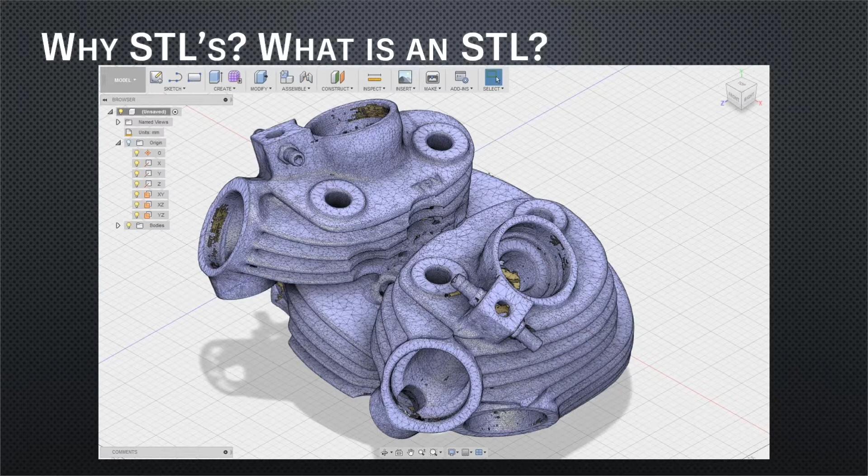So why even work with STLs in the first place? Oftentimes, that's all we have to work with. We go to war with the army that we have. Sometimes your boss or your customer scans the model, and that's all they're going to send you. Usually when you scan data, it comes in as an STL file or a mesh.

Oftentimes, too, we see that customers send you the STL model because they want to protect the IP, right? So intellectual property, they don't want to give away the dimensions. Maybe they want to keep some of that data to themselves until they're ready to really go forward with that model or that body there.

All right, so let's go ahead and jump into Fusion and start seeing how we tackle some of these issues, right? So before we do start, there was a recent update to Fusion 360. So of course, we'd like to cover some of the updates here as well. Really, the most notable update that I'm going to be talking about is related to the sketch functionality. So again, if we click on the sketch, most of you guys may be familiar with having a little arrow here pointing up. So essentially what that did was it brought that command up to your toolbar up here, right?

Now, though, we see that we have these 3 little dots, right? So if we expand those 3 little dots, we see that we have a couple options here. So now, of course, we do have that option to pin to the toolbar, but we also have this option to pin to shortcuts, right? So let me go over to, let's say, a slot in this case. So center to center slot. Let's say for whatever reason I use that a lot, I can go ahead and pin it to my shortcuts.

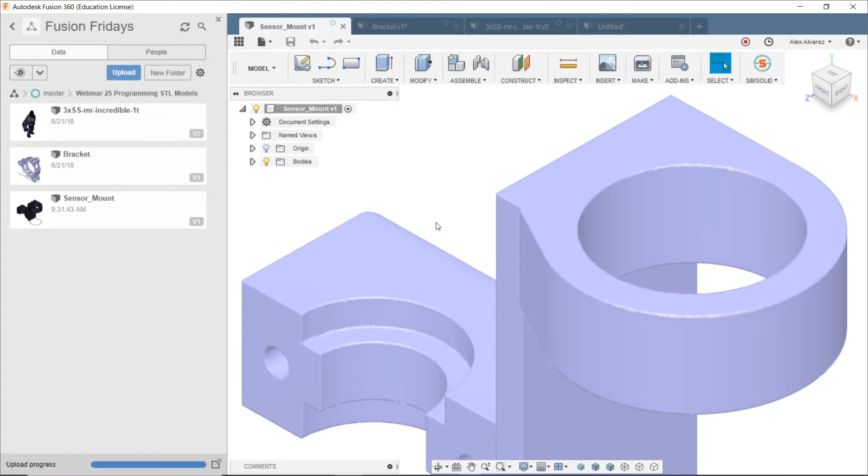All right, so let's go ahead and jump into a model here. So again, we have an STL model. Seems to be some sort of a mount. If we zoom in, we see that it's comprised of really thousands of triangles, right? We've been tasked with machining some sort of prototype for this. And the only critical region that we want to focus on is going to be this hole here. Let's say it needs to be within spec. So we need to make sure that we machine this hole as closely as possible to what they asked for, right?

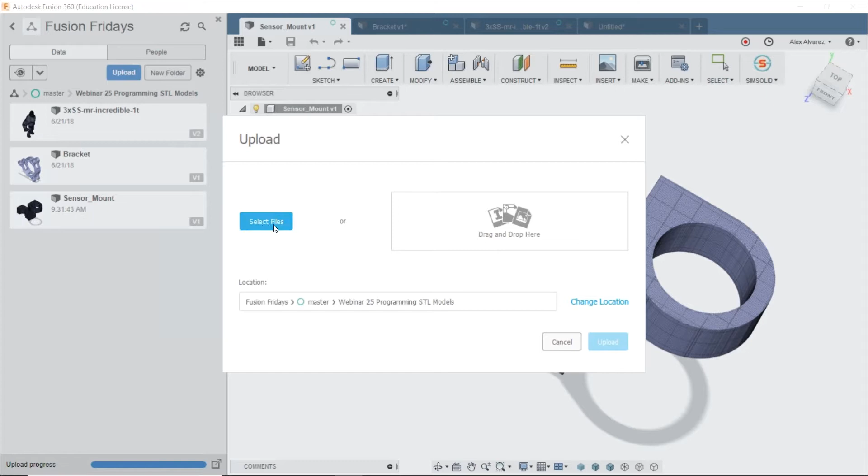So again, we're in the model workspace. A lot of people still aren't too familiar with how to upload models. That's pretty straightforward. You start a project, whether that's a new project or maybe an old project that you already have. Just go into upload. After you click on that, select the files, and then just hit upload here on the bottom, right? So it's pretty straightforward and pretty easy to upload your models into Fusion.

All right, so once you have the model into Fusion, we would want to go into the CAM workspace. For those of you that aren't familiar with the CAM workspace, it's pretty straightforward. The workflow that we're going to be following is from left to right.

We're going to create our setup, add toolpaths. Again, if you guys have Fusion 360 Ultimate, you do get 4th and 5th axis capabilities. And then after we lay out those toolpaths, we want to make sure that we simulate, have no collisions or unexpected movements. And then finally post out to our machine.

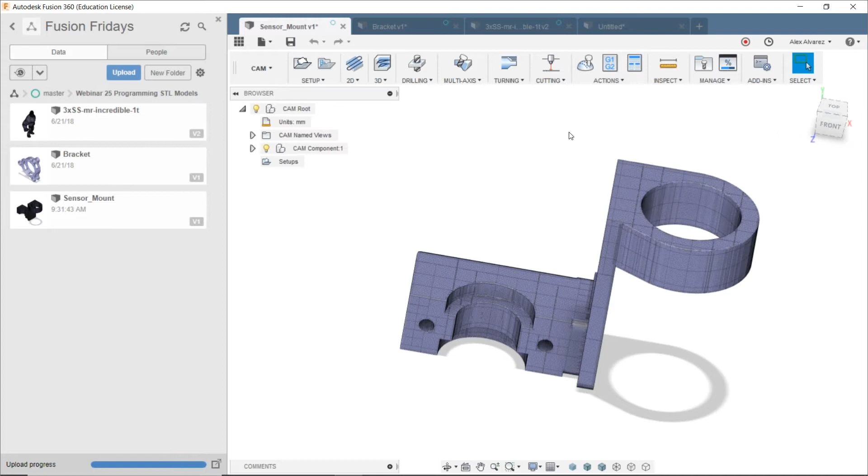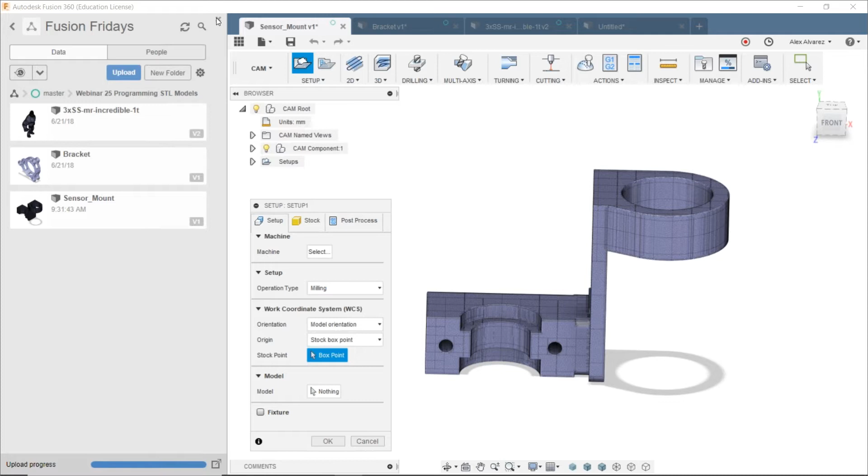All right, so first things first, let's go ahead and create our setup. If you guys have been using the CAM workspace for quite a while, you'll notice that something's different. When I click on setup, usually we see the stock defined around the model. This time we don't. Let me go ahead and make some room here. Let's see what's going on.

So if we zoom out, we see that we have, first off, the coordinate all the way down here, our work coordinate system. If you zoom in, you see that you have essentially a tiny little stock reference right here. So a lot of people forget that we have this little model section. This model section is essentially going to tell the software, okay, that's the model that I'm going to focus on for creating toolpaths. In this case, there's nothing there. That's why it doesn't see which body I'm going to be selecting.

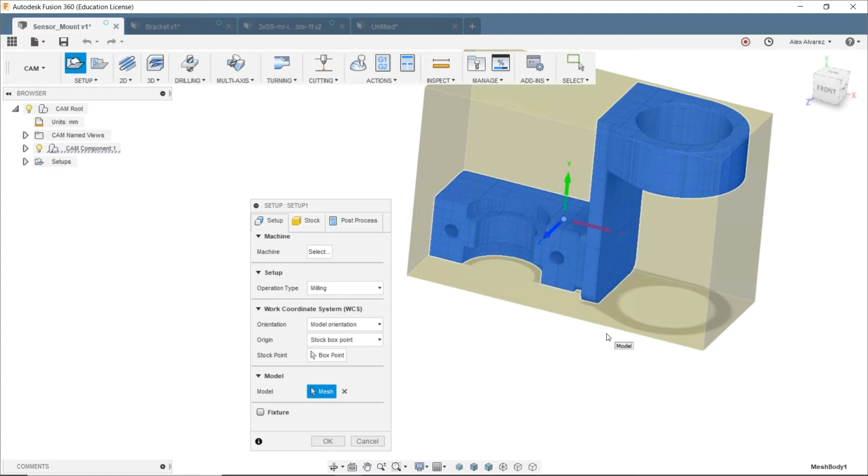So let's go ahead and make sure that we select this initial body. Notice too that you don't have to really convert that STL file into a different body. You don't have to convert it into a different file extension. You can drive toolpaths off of STL files directly. So that's one of the key points that I want to get across here. So we're able to get the stock preview of the STL file.

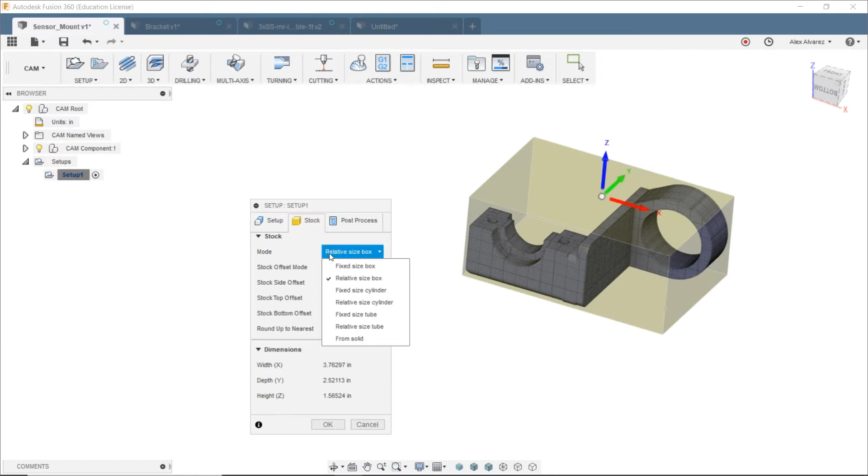Again, selecting our stock, it's at relative size box. Notice that I'm in millimeters as well, so let me go ahead and change that real quick. Change that to inches and click OK. All right, so I'm in relative size box. Again, I get some weird dimensions for our stock size. I can just change that to a fixed size box, get some nicer values down there. The work coordinate system, again, is positioned center block of the stock, which is fine with me. So I can just go ahead and click OK.

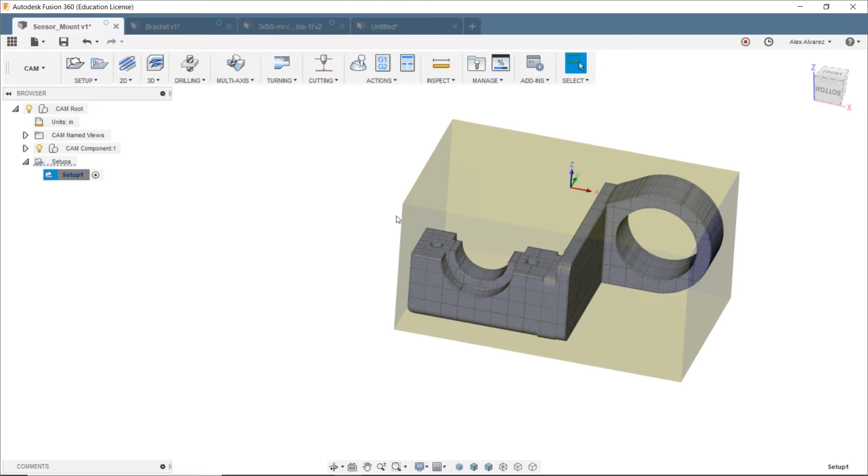All right, so we got part of it done. We selected the stock, we picked where our work coordinate system was at. Now let's go ahead and start adding some toolpaths. So again, I want to do a roughing strategy, and like I mentioned, we're just going to focus on this area here.

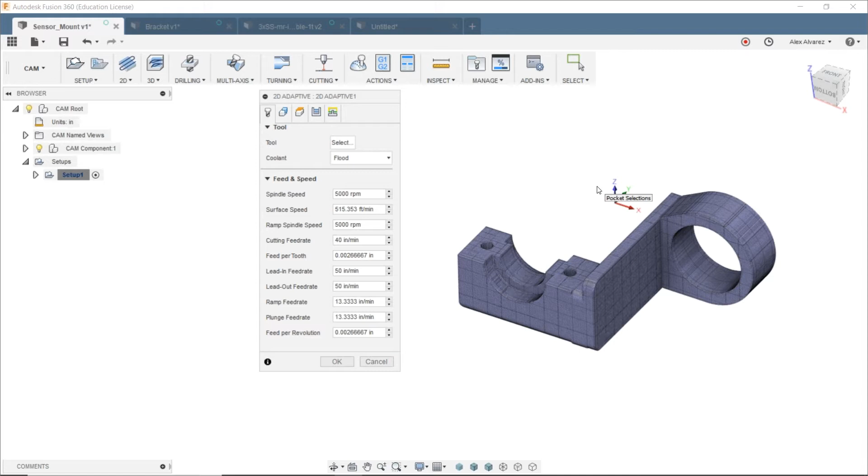So let's go ahead and try to do some sort of 2D adaptive strategy. Let's go ahead and select our roughing strategy. Again, if you guys notice, our tool orientation is like this. So this is going to be kind of killing two birds with one stone here, but I'm going to be talking about positional milling. In this case, we're assuming that we have a 5-axis machine.

Again, we're going to want to rotate the part this way. And notice that my work coordinate system, though, is positioned in the wrong orientation. So to do that, if you guys have Fusion 360 Ultimate, you have this little option on the bottom, the tool orientation. That's essentially how you're going to tell the software to rotate the part, or essentially how you're going to be telling the machine to rotate it in respect to whatever work coordinate system you had originally.

Now, again, when working with STLs, you don't have the ability to select on faces. Usually we're able to select this face and it reorients the work coordinate system accordingly. So in this case, if we zoom out again a little bit, we see that we still have these planes here, so let's go ahead and select this plane there. And my x-axis is going to be going this way.

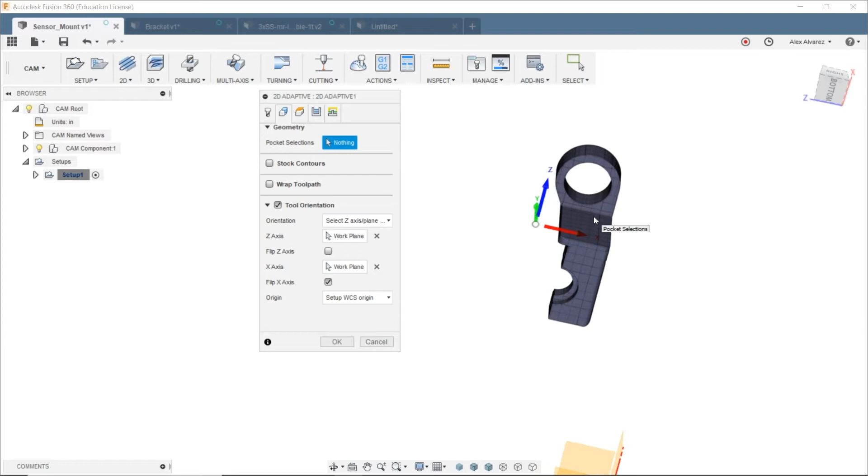All right, so now that we have that, let's go ahead and pick some geometry. For pocket selections, which pocket do we want to machine? We want to machine this pocket right here. So we zoom in here. What's going on? I'm not able to select any geometry.

That's because it's an STL file. First off, we don't even have nice geometry to select, so it's not going to allow us to do that. Let's zoom out a little bit and figure out a better way to do that.

So we tried using a 2D toolpath. Again, 2D toolpaths really need some sort of geometry to work off of, whether that be a face, some sort of edge, some sort of geometry or chain to drive that 2D toolpath. Now 3D toolpaths work off of the body that you have. It looks at the stock, it looks at the body that you have inside, and then it tries to remove as much of that stock as possible until it gets to, or as close to, the model as it can.

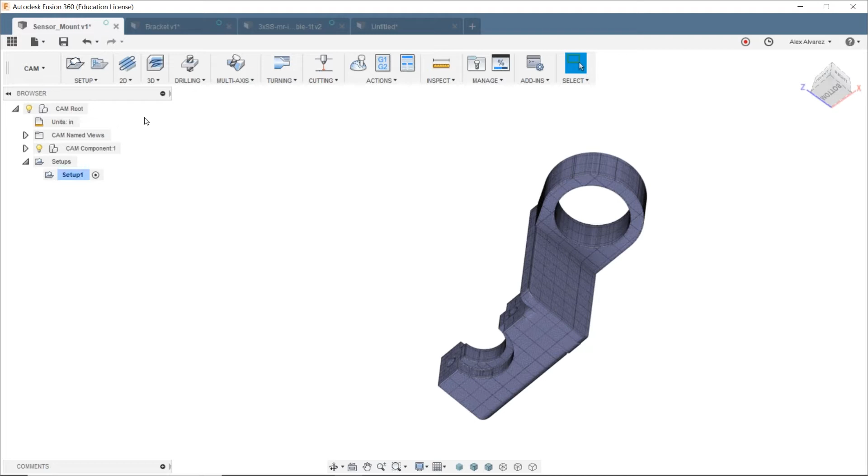So that's what we want in this case. Let's go ahead and try a 3D adaptive. Again, selecting our tool - in this case, let's say I can use a 1/2 inch flat.

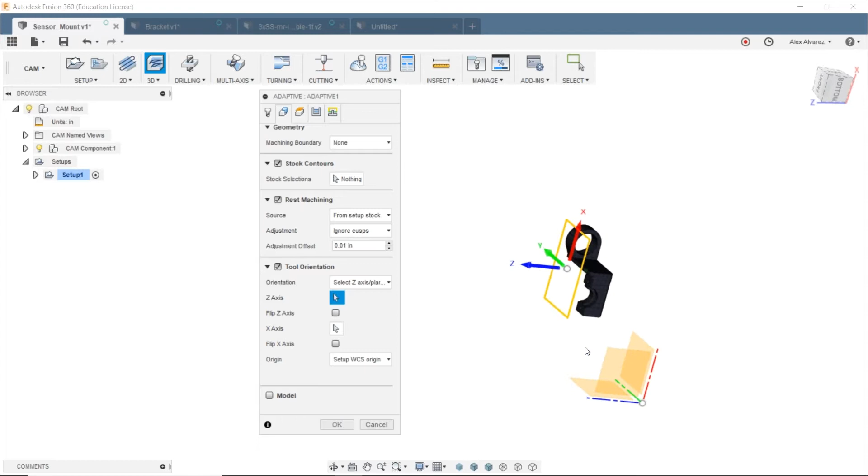And then selecting our tool orientation, same thing as for the 2D adaptive. In this case, we don't even see the tool orientation, and that's because we don't have it checked on. If we check it on, we see that we have those planes up here. So once again, the z-axis is going to be this one right here, and the x-axis is going to be perpendicular to that plane. Just reorient that - okay, so we have this selected.

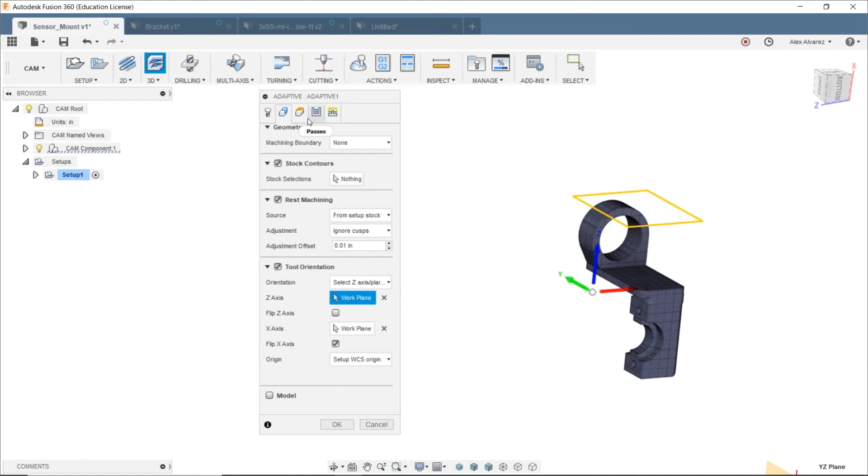For machining boundary, again I wanted to look at the entire model or the entire boundary of the model, so I don't necessarily need to select anything there. What I do want to constrain, though, is the heights. If I left it as it is now, the tool would try to machine all the way to the bottom of that part.

So typically, especially when people are starting off with 3D toolpaths and they're not too familiar with how they work, I'd preach that a lot of people should just select the tool and just select the machining boundary and then click OK and see what the toolpath gives you. If you guys aren't too familiar with 3D toolpaths, typically try to stick to that workflow. If you come into the passes tab and try to change some of these options, and the toolpath does something you aren't familiar with, it's harder to go back and figure out which one of these options made that toolpath act the way it's acting.

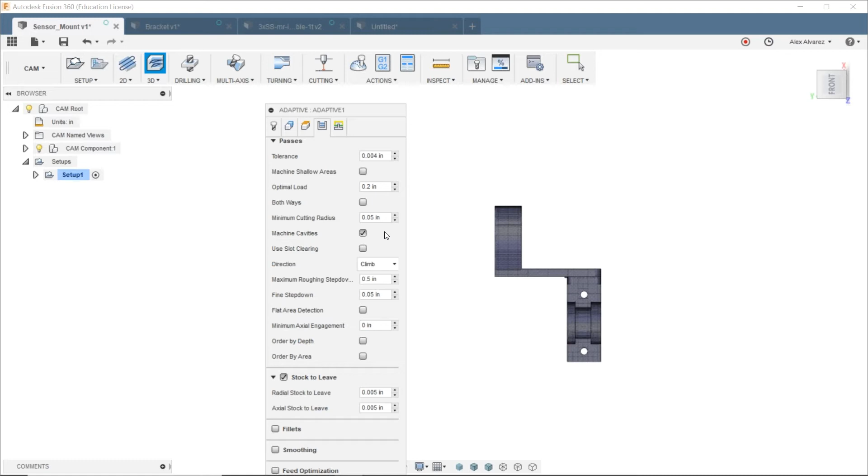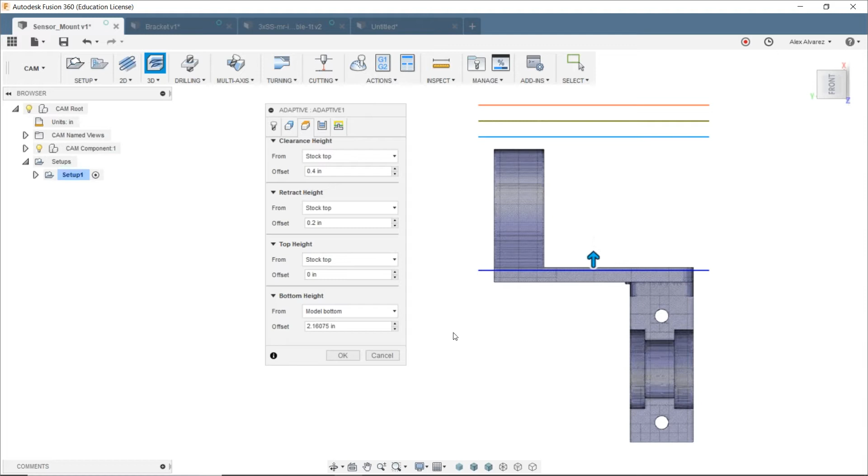So in this case, all I really want to change here then is the heights. The bottom height, I can do model bottom. And again, if I knew some of these values, I can go ahead and input the values, but for now I'm just going to kind of use the eyeball method, get somewhere close to the bottom there. That's going to be fine with me.

All right, so there's our toolpath. Again, it's a roughing toolpath, so by no means am I going to have nice surface finishes yet. We can go ahead and simulate it. Let's go ahead and simulate that. We can turn the stock on.

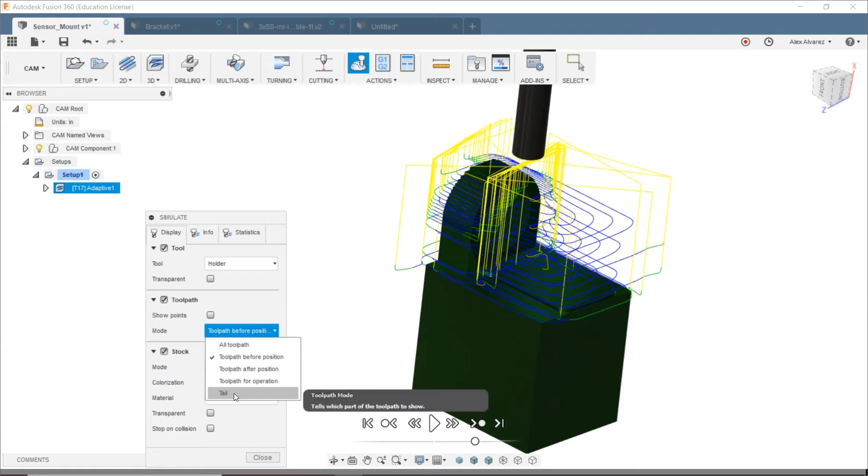Again, the option that I like to stay with for the toolpath is tail, and it just shows the toolpath as it already goes through it. So I can speed some of this up. And of course, I can go back into the toolpath, fine tune it if I need to, maybe change the retraction policy to get rid of some of these high retracts. But for now, that's going to do it for me.

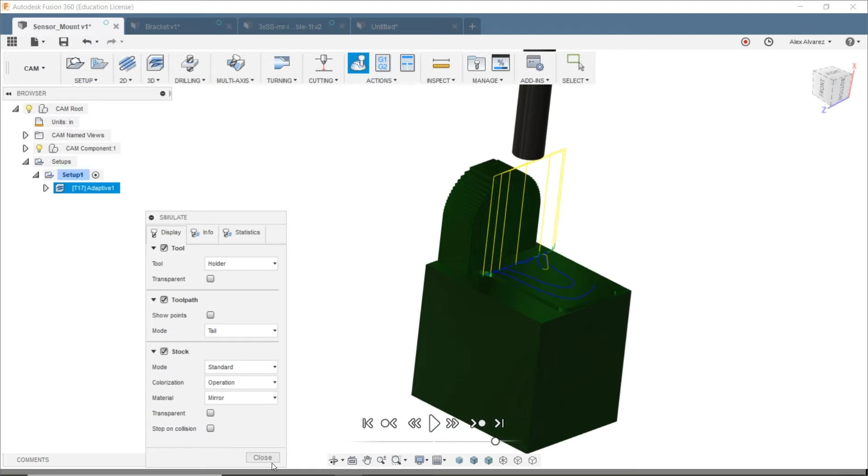So now let's go ahead then, and let's say we're going to rotate the part this way. We want to machine the bore here. So first off, we can go ahead and do some sort of a facing operation here for the top.

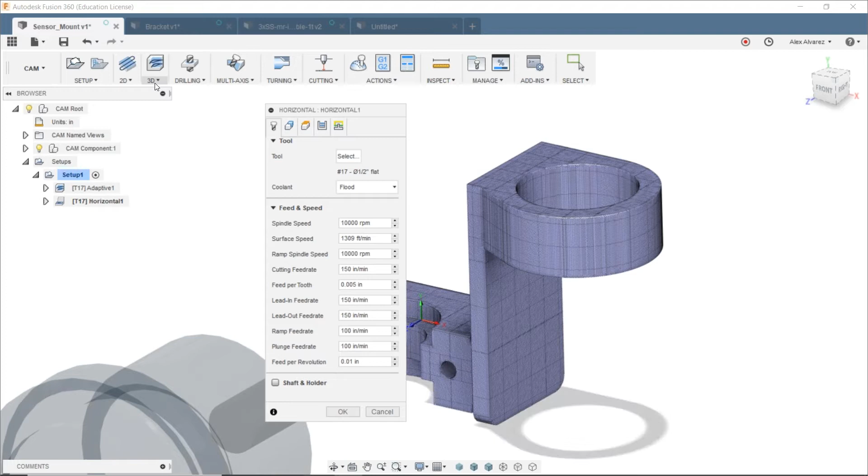So again, for that, I would probably use a 3D horizontal. If you kept your cursor over the 3D horizontal toolpath, it would show you what that toolpath is looking for - it typically looks for some sort of a flat face. It looks at the entire model; anywhere you have flat surfaces, the tool is going to try to machine up to that flat surface. So it's definitely a good finishing strategy, especially if your model has a lot of flat surfaces.

Right, so again our tool comes in this way. Let's go ahead and reorient that - tool orientation, z-axis is going to be this one.

X-axis, I can change it to be this one right here. There we go.

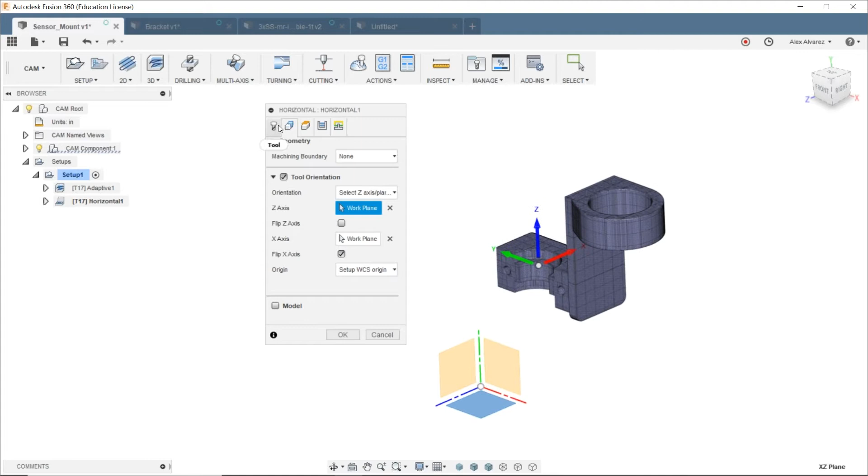Once again, we have to contain it, contain the heights, right? Because if I kept it like this, it would try to machine this other flat surface that it sees here.

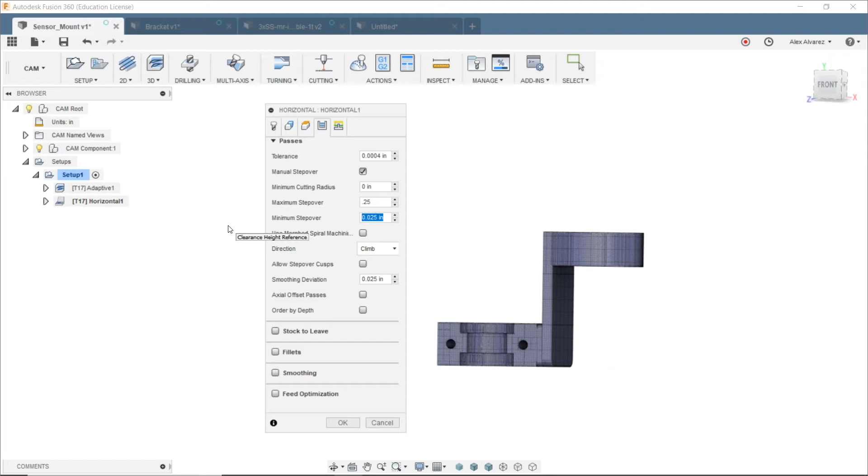So let's go ahead and just contain it somewhere around there. And then for passes, we can do a manual step over. The maximum step over, we can do a quarter inch, and a quarter inch there as well. Click OK.

And then there's a finishing strategy for that flat surface. Now that we have that, let's go ahead and try focusing then on this bore here, right?

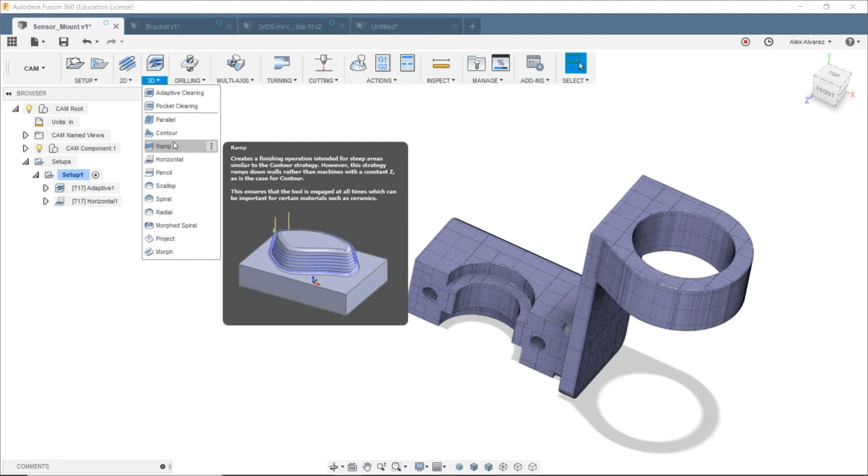So again, I would probably use maybe a... let's try a pocket clearing. Pocket clearing would probably be a nice toolpath.

Notice that I have to do the tool orientation again and go through that whole process all over, so I can go ahead and cancel that. My 3D horizontal toolpath is already set correctly. Maybe the tool, I'm going to need to change it, right? It's not going to fit all that great in there. But really, that's going to be the only thing that I need to change.

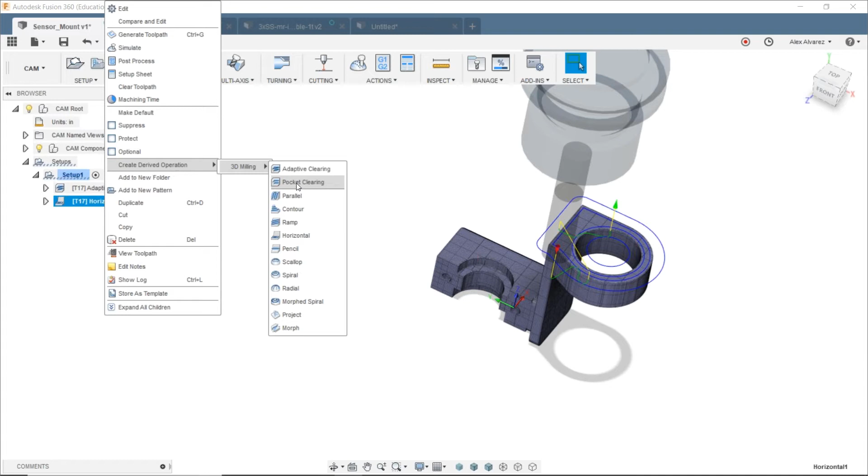So I can just right-click on this, create a derived operation. It's going to take all the parameters that drive the horizontal toolpath, and I'm just going to be creating a different toolpath, using a pocket clearing instead. Like I mentioned, I'm going to be changing the tool that I'm using, so in this case I want to go with a quarter inch flat.

The passes, I can go ahead and just change the height. Maybe this time I do want to go a little bit below that. So that's going to be fine for me.

Passes, again, it's a quarter inch tool, so maybe I wouldn't want to use a quarter inch step over. In this case, I can do some sort of expression. If you guys aren't familiar with how to use expressions, you can just right click on the parameter and edit the expression. In this case, I'm going to do tool diameter, that's 0.2, 20%.

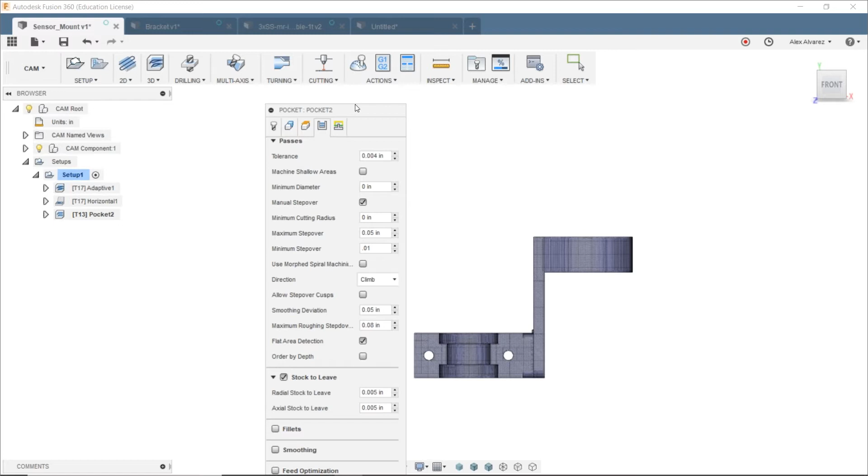Here it's telling me, okay, it's a little bit higher than your maximum step over, so go ahead and change that. Maybe this one... well, I don't know, minimum step over 10 thousandths. Stock to leave is enabled, that's going to be fine. And just click OK.

So once again, let's see what kind of toolpath it gives us. All right, so here we go. Gave us a toolpath. And notice that it's trying to machine the rest of the model here.

So again, this goes back to selecting geometry and containing that toolpath to some sort of area around this model. But again, like we've been talking so far, we don't have any geometry to contain that boundary. So let's go back into the model workspace.

I'm going to want to create some sort of a sketch to contain that pocket toolpath. So first things first, I do want to make sure that I capture the design history, so if I do need to go back and make a change to the sketch, I can always just edit that sketch on the bottom here of the timeline. Again, change that to millimeters, inches.

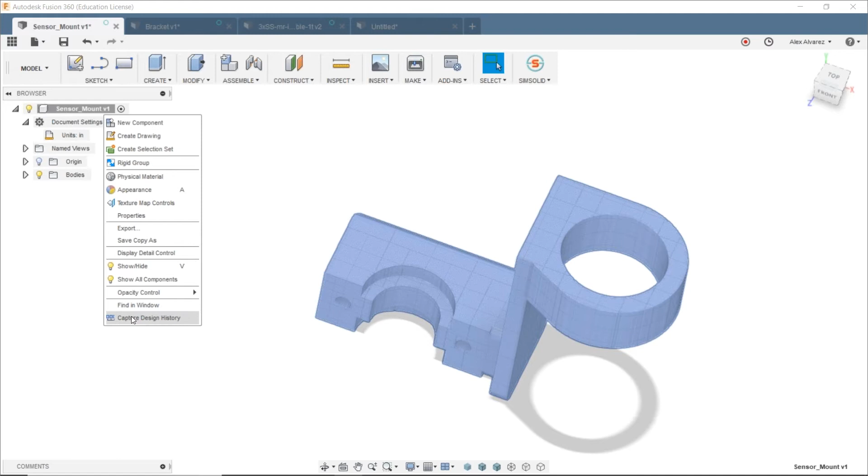The way you capture design history is you right click on the very top of the node here, and the last option is going to be capture design history. Now notice that we have this little timeline at the bottom. Now what I can do is start a circle, and it doesn't really matter which plane, it doesn't matter if it's on the top of that face either. I just want to make sure that we contain that toolpath.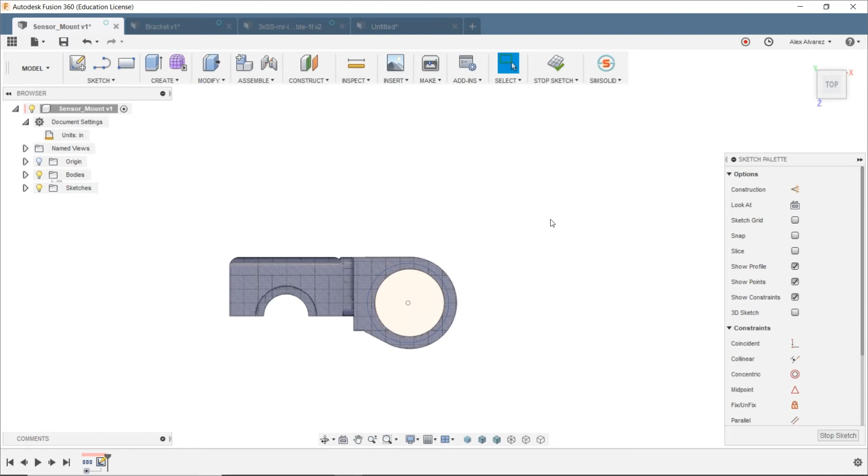Somewhere around here. Again, it doesn't have to be perfect. It's going to look at the boundaries of the model, so it'll know not to machine the rest of the model. So again, let's go into the pocket operation and edit that.

Geometry, the machining boundary is going to be a selection, because I'm going to select the sketch that I just made. Notice that it turns green. So a lot of people get confused with the machining boundary and the stock contours. You want to make sure that you have the machining boundary selected.

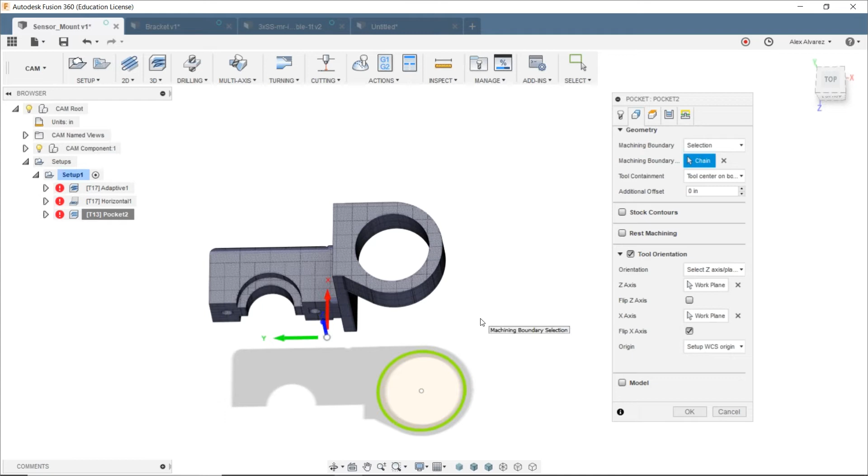If you would have done stock contours, then it probably would have given you a different toolpath, and it probably wouldn't have worked. So in this case, I selected the boundary. Again, I contained it using the geometry tab, so I don't need to have the sketch perfectly centered.

And we see that we have the pocket toolpath now ramping down to that hole. So then this leads us to how we're going to generate a nice finished pass for that. So again, maybe the pocket operation works, and maybe we don't leave any stock, and maybe that's a nice toolpath, but I want to still go back in there and do one last finishing pass.

So typically for that, we would use a 2D toolpath, maybe a 2D contour. We just want to follow the edge of that circle. But as you guys have been seeing, we don't have any geometry to drive that model with. So let's go ahead and see what we would do here.

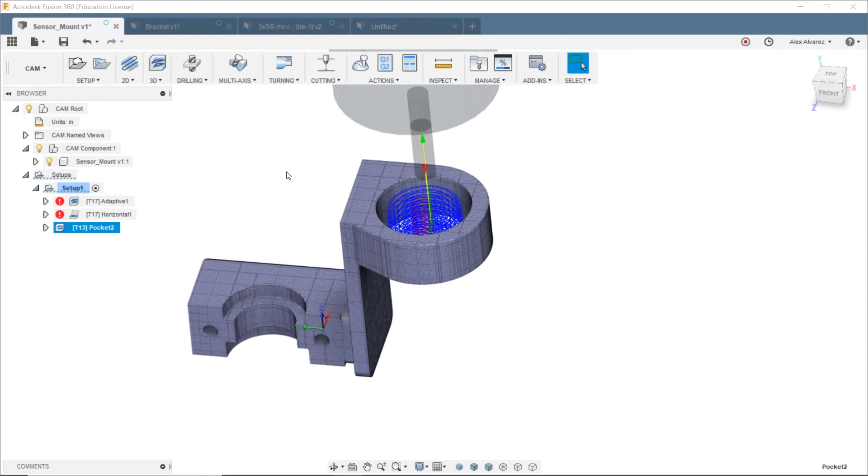For that, we're going to need to go back into the model workspace. Let me just stop this sketch real quick. All right, so we're going to be starting a new sketch. We hit the little drop down for sketch. Notice that, again, we're working with the STL, so we have this little option here that says mesh.

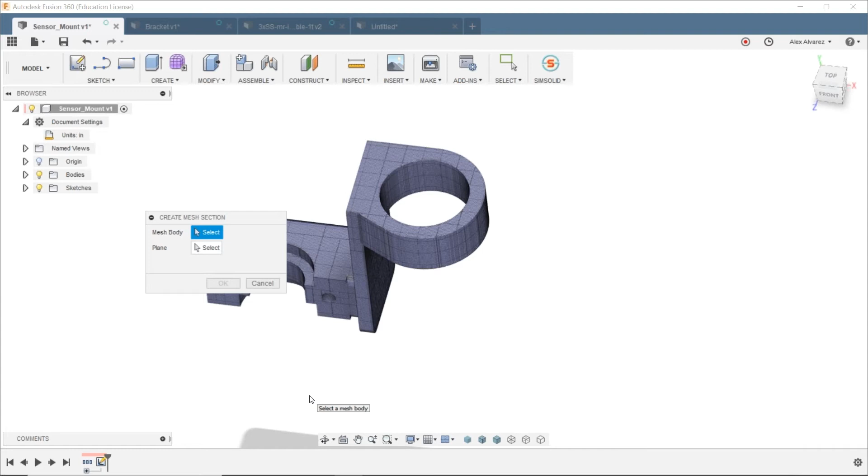Now we want to do a mesh section. So it's going to create or project, essentially think of a slice plane that slices this mesh, and then it's going to project that mesh onto that plane. So which body do we want to project? We want to project this one.

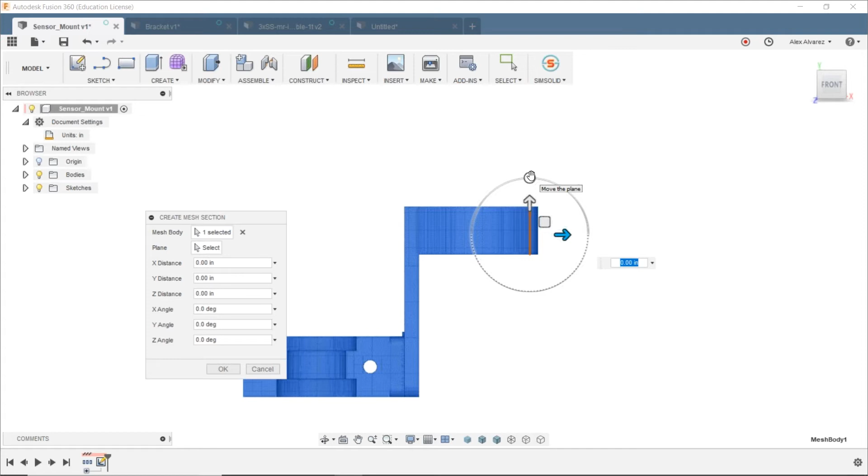Brian talked about this in his, I believe, 2 or 3 webinars ago, already on our YouTube channel. If you guys want to learn more about STLs, or the workflow Brian uses to tackle some of these STLs, go to our YouTube channel and find that video. Yeah, it was the recap video we did on the Fusion 360 meetup in Costa Mesa, California. I pretty much showed the create mesh section, which is what Alex is showing you guys here, creating the silhouette of the STL.

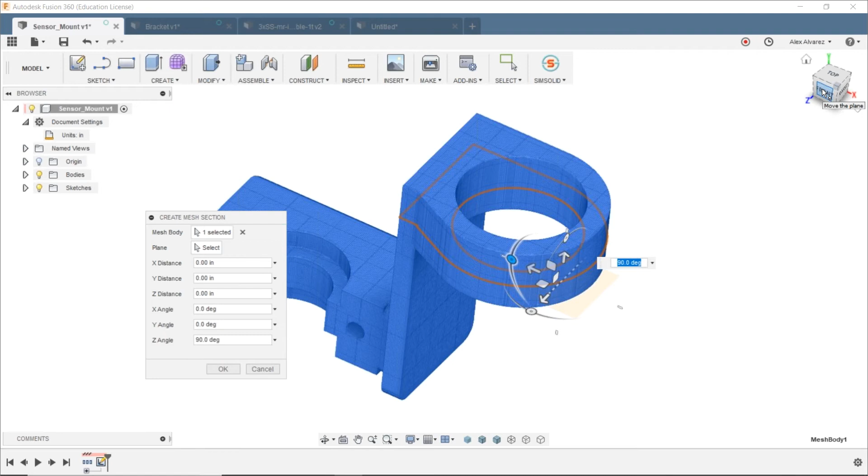So notice that if you had a plane, maybe you could have selected the slice plane and then projected the sketch onto that plane. In this case, we don't have a plane, so we just automatically selected the mesh body. Again, we can position that slice plane wherever we want in respect to that model. In this case, it needed to select this little portion of the model accordingly. So that's what we want. Let's just go ahead and click OK.

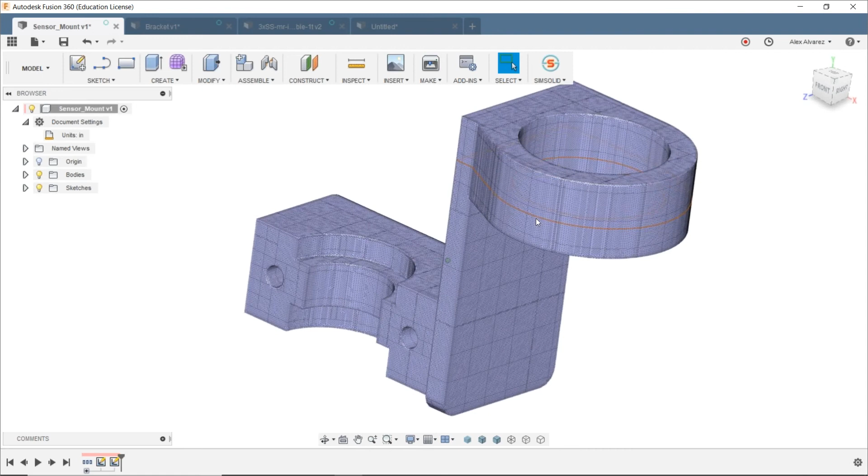All right, if we take a closer look here, we see that we do have that projected sketch. So now what we want to do, once again, let's go into Sketch under Mesh. We want to fit curves to mesh section. Brian talked a little bit about this and went into depth on what this does. But you're essentially going to derive some of this geometry and convert it, maybe into a spline if you want to use that.

But for me, what makes the most sense is converting that data or geometry into a circle. So which mesh section do we want to convert? That one that we just created. And so we click on that.

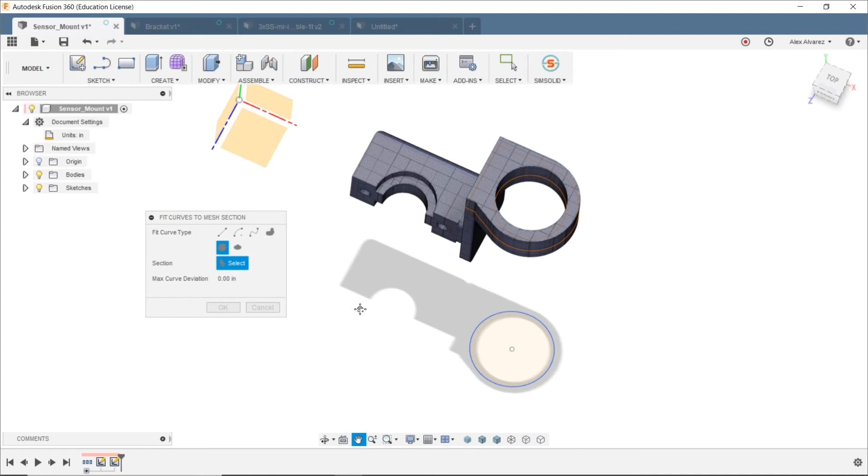So essentially, the orange lines that you guys see there, they're not a sketch yet. It looks like a sketch, but it's just a representation of the mesh that he has. Yeah. But the tool Alex is using now is going to pretty much overlay the orange lines, or the reference lines. Yeah. So what happened there, guys, is that I had already exited the sketch.

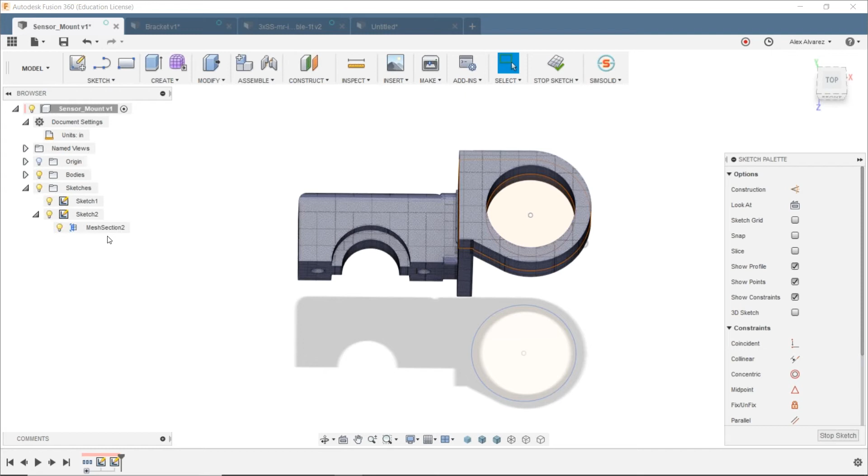So you want to make sure that you're still in that mesh section. Once you are, you can go ahead and click OK. Right, and then we have that mesh section there, and it overlays that circle on top of it. So if we turn that mesh section off, we notice that we just have that plain circle that we converted, right? So let me turn this one off real quick.

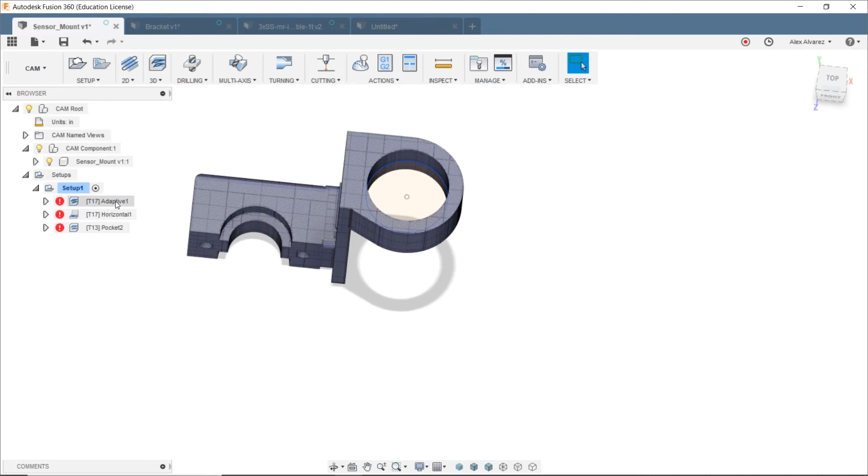Now we can go back into the CAM workspace. Again, we have that 2D adaptive, we have the horizontal toolpath, we have the pocket, kind of roughing that bore out. Now I can go in there, use a 2D contour, right? Again, I can use that same 1/4 inch flat. This time I do have to go back in here and select the tool orientation once again.

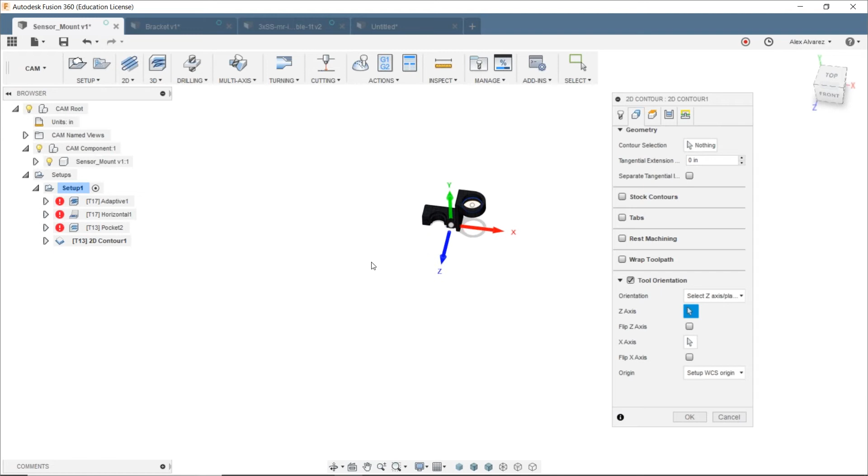We can go ahead and turn on the origin if we don't see it. Okay, so that's going to be fine with me. And then just select that sketch there. If we take a closer look, by default, the heights for that are going to be the selected contour. So we can do model bottom, and just use the eyeball method. We want to make sure that we go a little bit lower than the bottom of that hole. Somewhere on there would be fine.

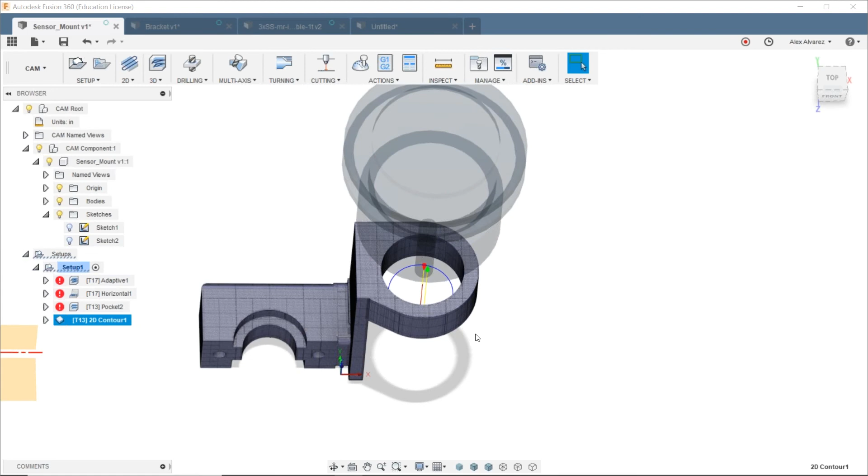And that's going to really be it. So we can go ahead and click OK, and we see that we get a nice finishing toolpath to finish that hole out. So again, this is a rare scenario, if you wanted to create some sort of exact toolpath or exact geometry. If you wanted to be even more exact, we can edit the toolpath, go into passes, and let the machine operator do the calculations for that hole.

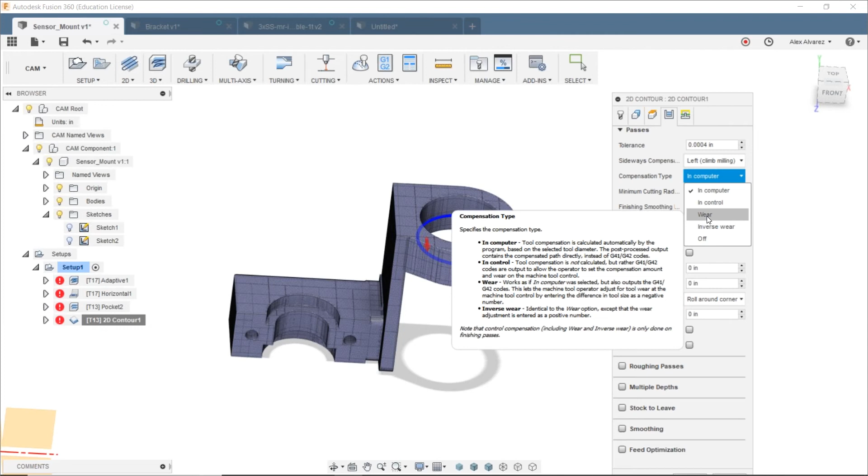So once you mill out the hole with this toolpath, let's say it's off by a couple thousandths, you want to make sure that you set this compensation type to wear. That way the machine operator can go into the machine controller. Maybe it's off by a couple thousandths; he inputs that difference into the machine controller, and then you're going to get that exact hole diameter. So if that's what you're worried about, change that compensation type to wear. Okay, so we can click OK.

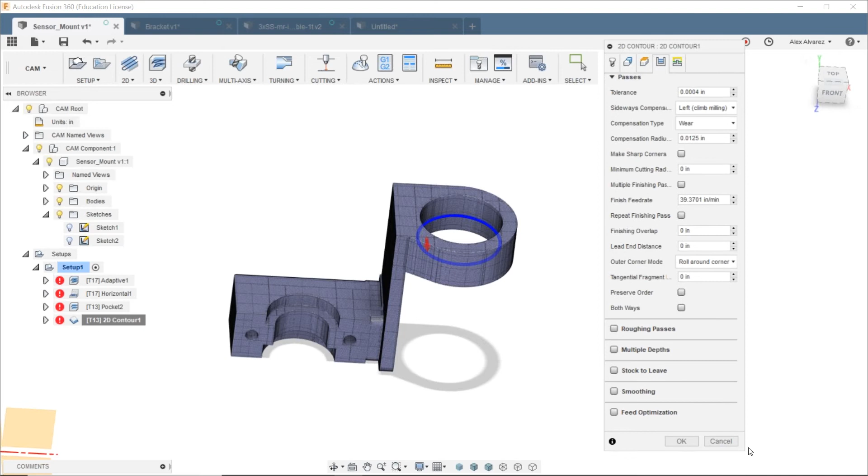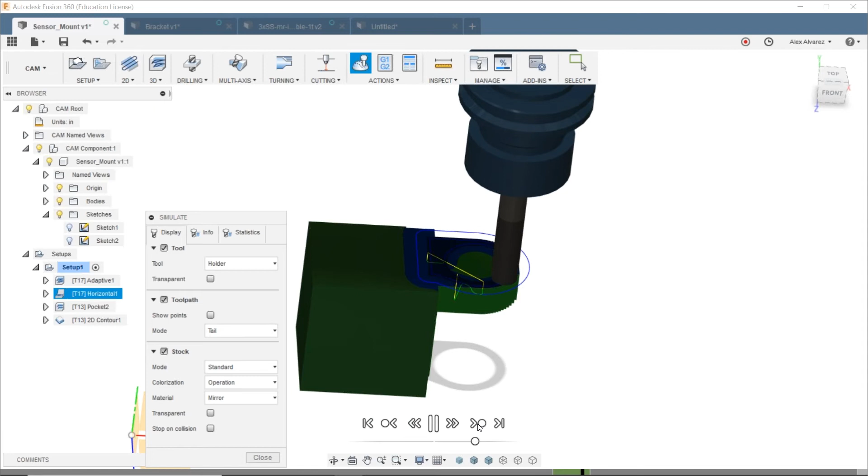We can regenerate that. So click the entire setup, Control G on your keyboard, and it regenerates the entire toolpaths. We can simulate that real quick, so we can do simulation. Finish an operation there. Roughing pocket, and then we finish off with our 2D contour.

And you don't necessarily need to use the create mesh section method to create that circle, but it is a good way to find the center of that circle. And then you can go back later with the regular sketching tool and create your own defined diameter or radius of that circle, so you know for sure the size of it is exact. Yeah. So that's to give you a reference point for the center of the circle there.

All right, so let's go over to our next example. We just covered how to add toolpaths to an actual STL model. Let's go over to the bracket over here. So now we have a bracket. This time, let's convert the bracket to an actual body representation, or B-rep. Notice that right now I can't really select any edges. So if I expand the bodies drop down here and right click on mesh body, we have this option, mesh to B-rep.

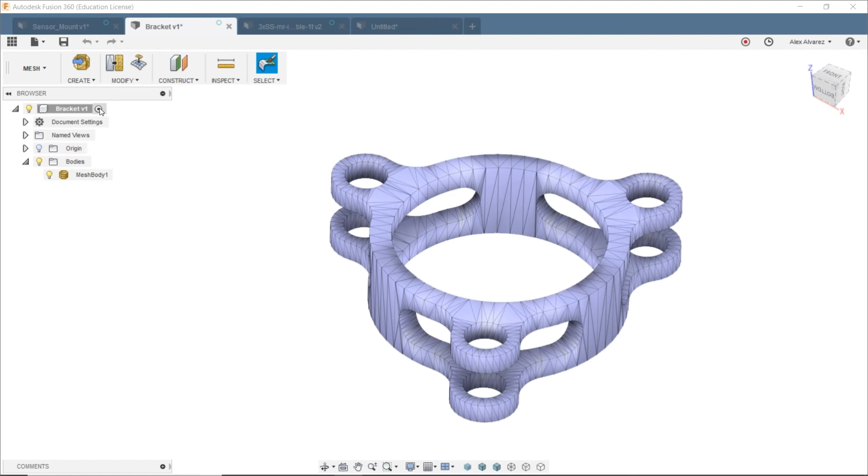Now a lot of people sometimes don't even see that. You want to make sure that you are in the modeling workspace. Notice here I changed into the mesh workspace. If I right click on that, I don't have that option. So if you don't have that option, just make sure you're in the model workspace. Go ahead and right click, mesh to B-rep.

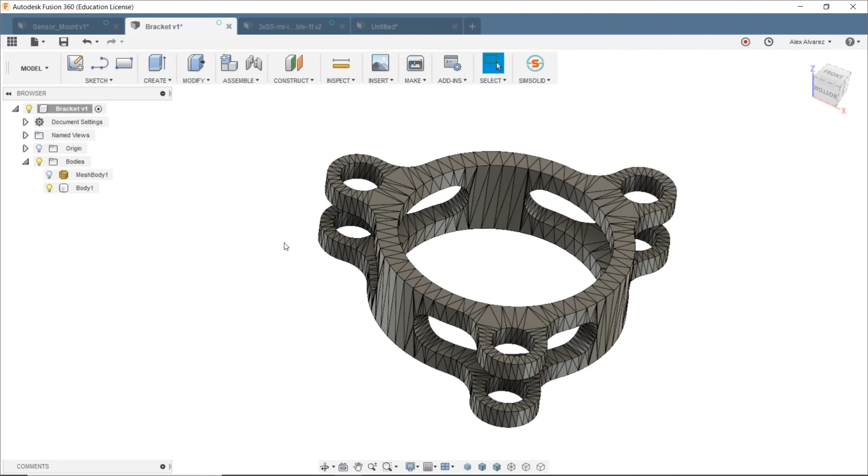And then we have that mesh body there. We're going to convert it to a new body, hit OK. And now we have an actual body representation there. So let me go back one, and let me do a quick analysis of this model. So I can do a sectional analysis, turn the origin on.

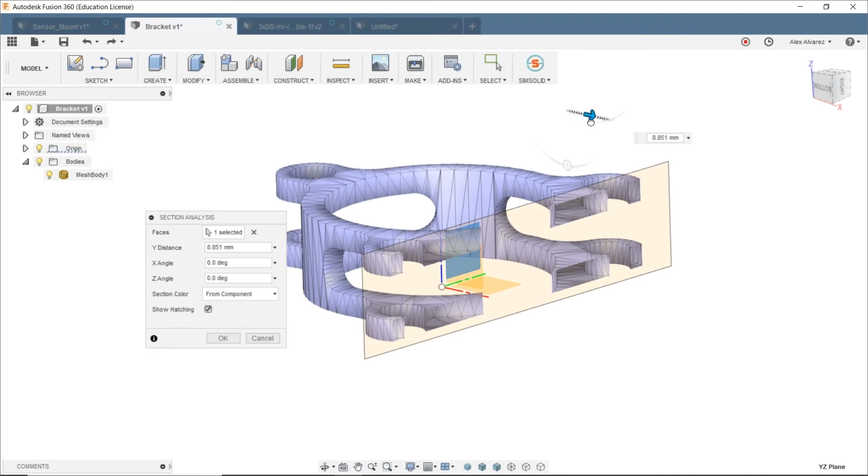If we notice, we were doing a half section or a cross section here. Notice that it's hollowed out, right? Like I mentioned in the beginning, it's just a group of 3D triangles essentially coming together and building this model. So it has no actual solid data attached to it.

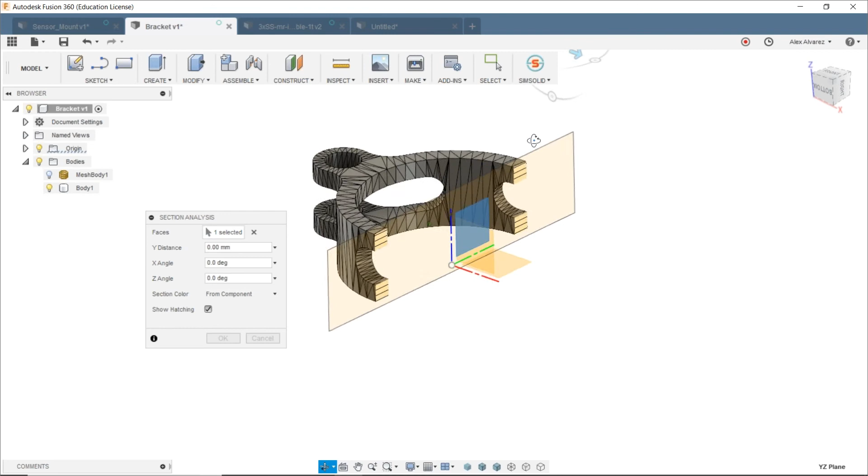So now if we convert it to a B-rep and inspect that section analysis once again, turn the origin back on, we actually see that it does get filled up and turns into an actual body itself. So that's one method to convert the mesh body to an actual body.

Now, sometimes it might not let you, and that's because you might have some sort of a hole in the mesh. You can either manually go in there and fix it yourself, in the mesh environment, or maybe use something like Meshmixer and fix the mesh that way.

So now that we have this, let's go ahead and create a quick sketch for our stock. We can just do an arbitrary circle here. Once again, it changed into metric units, so I'm going to change that to inches. Click OK, and we can go ahead and extrude.

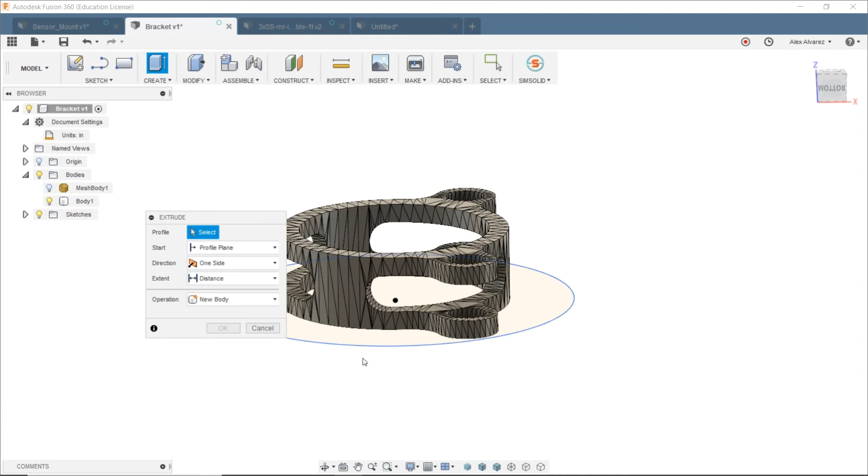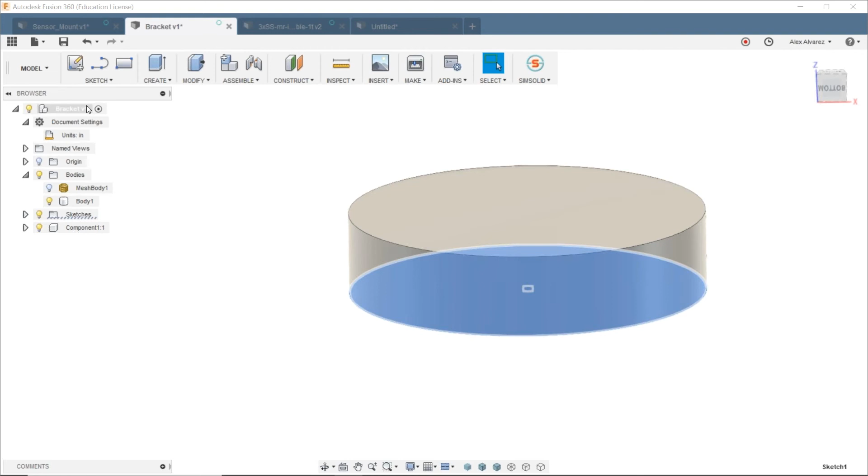Make this a new component. So this is one of those moments where do as I say and not as I do. What you would have wanted to do here is right click on this and made a new component. You can do that in the extrude command, but that sketch is still going to be associated with the main parent file. So the correct method is to right click on the bracket and hit new component, and have everything in that specific component.

But now that I already created it, let's go ahead and change the opacity level here, so we can see through it and see how it looks like inside the stock. Let's go into CAM.

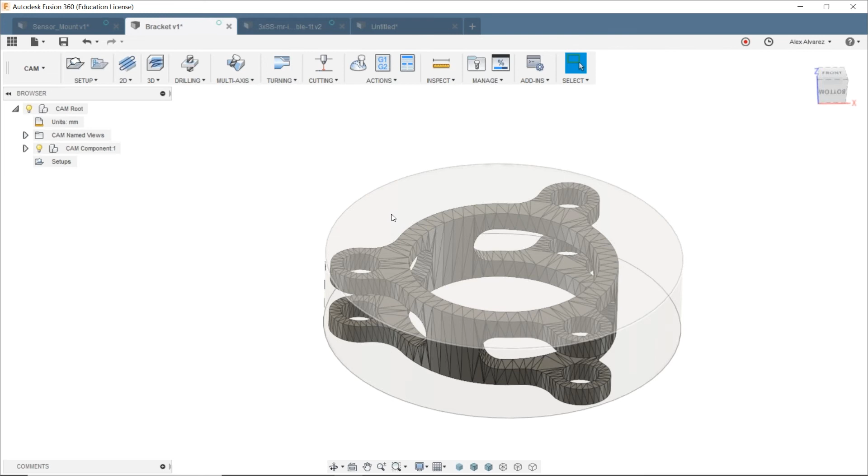All right, let's go ahead and start adding some toolpaths to this. Now that we actually converted it to a body representation, we're able to select geometry from it. So if I go to stock, this time I want to use a from solid - the solid that I just created. My work origin is correct, so that's fine there.

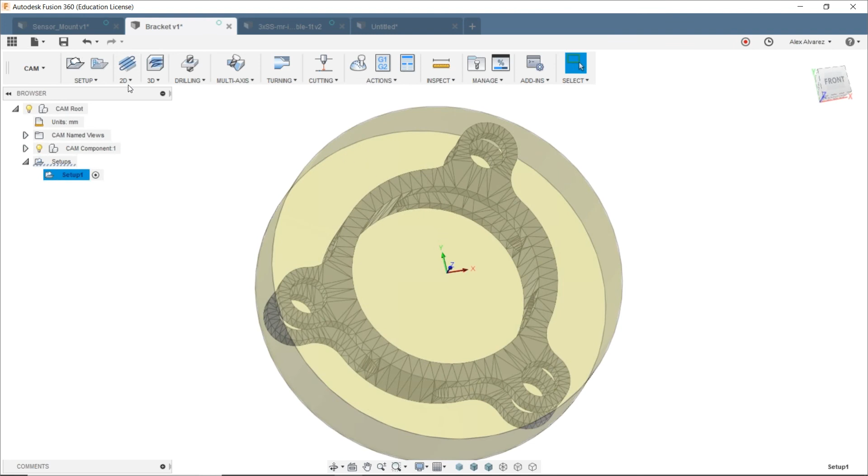So now what I can do is, let's say we want to use a 2D adaptive. To start off I can probably use that 1/4 inch end mill again. Use a 1/4 inch flat.

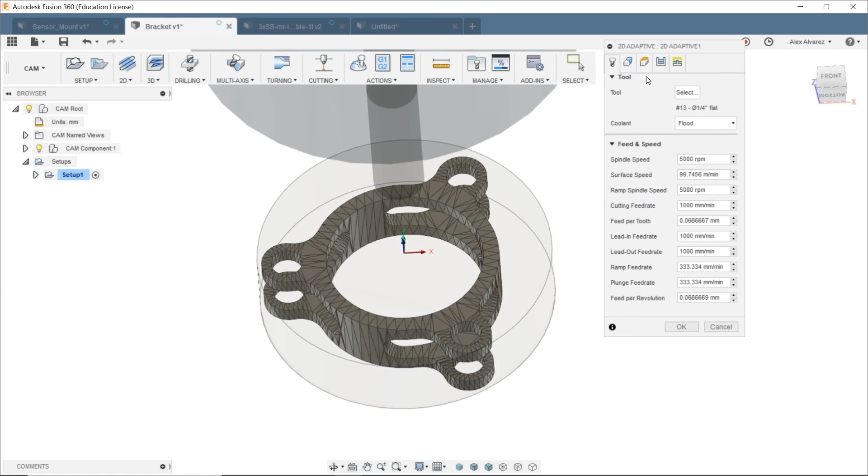And the reason you created that cylindrical body that you made opaque was so you can reference it for your stock, correct, Alex? Yeah, I could have even given a dimension. Usually it's easier to just create your stock sometimes. In this case, that's what I did. I was trying to create a from solid stock beforehand, and for some reason it was giving it off center, so that's why I decided to do it this way. It's a good workaround to go around something like that.

Notice that I can still see the stock. I can always just go to my design history or design tree here and turn off the stock. In this case, we don't need it anymore.

So now that I go to geometry, let's go ahead and try selecting some of these outside loops or contours, so you guys can see what's going on. If I hover over some of these, it's taking a weird transition, trying to go up. This one isn't actually too bad, but I still need to close the loop. What I see a lot of people do is they continue clicking.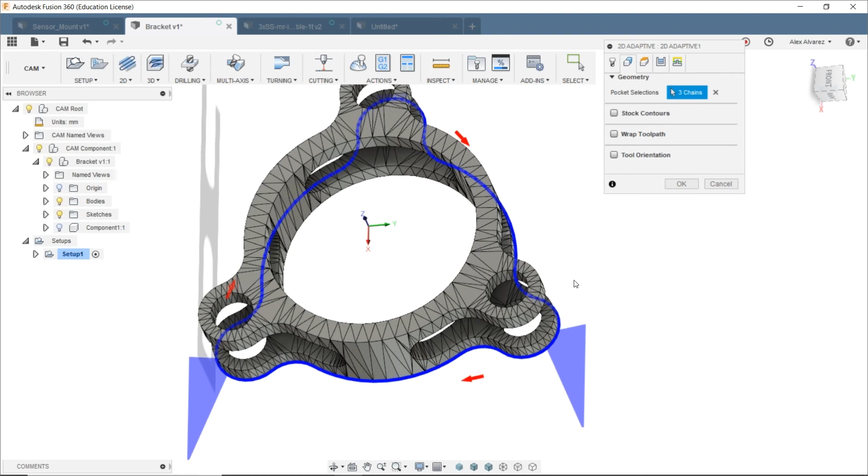So they continue clicking over here, then they continue clicking over here, right? So then essentially they have three different arrows or three different chains. And that's often bad practice, right? You just want to go ahead and select the single loop. You can go ahead and click on it once again, and then start working your way around that model, right?

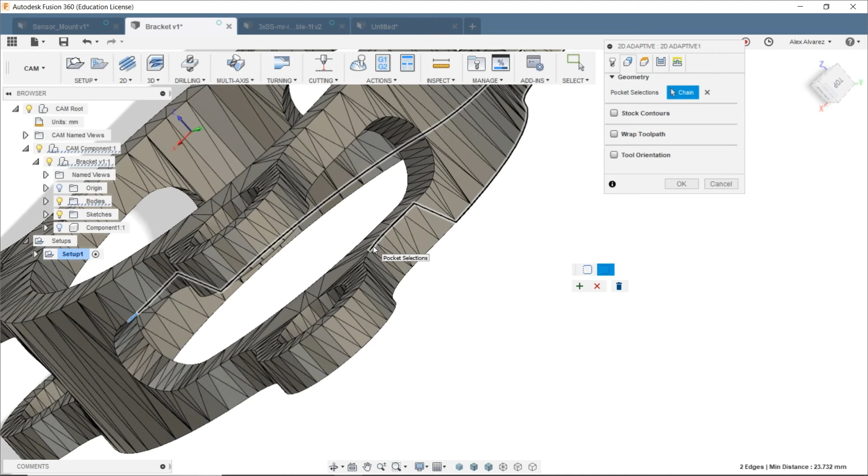So we have this little edge here selected, so you can click on that, click on this one, right? So notice that if you pay close attention, that becomes pretty tedious, right? And we don't want to do that. So instead, let's go back into model. Right, and of course, I didn't capture the design history, but let's do that now, right?

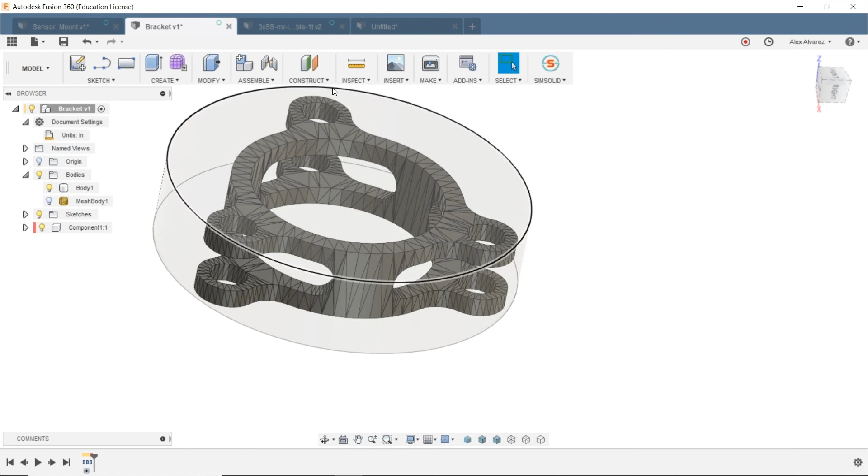So let's go ahead and construct an offset plane. Right, so where do we want to offset it from? We want to offset it from the bottom of that model. We don't even need to go up into the model that high, right? So a thousandth of an inch is fine. Okay, so I constructed a plane. Maybe some of you guys can already see what I'm about to do here, right?

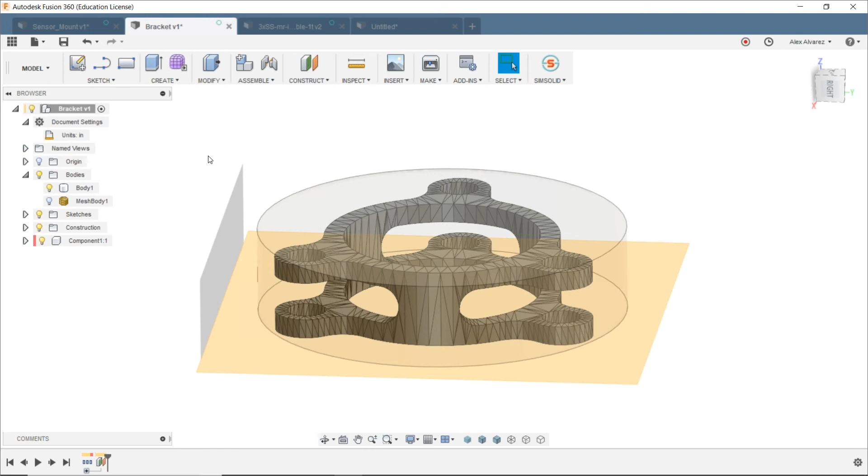So I can go into modify, and we have this split body option, right? So let's go ahead and use a split body. Body to split: I want to split this body, and our splitting tool is going to be that plane that we just created. Gives you a nice little preview there of what that splitting tool is going to be doing. Let's go ahead and click OK.

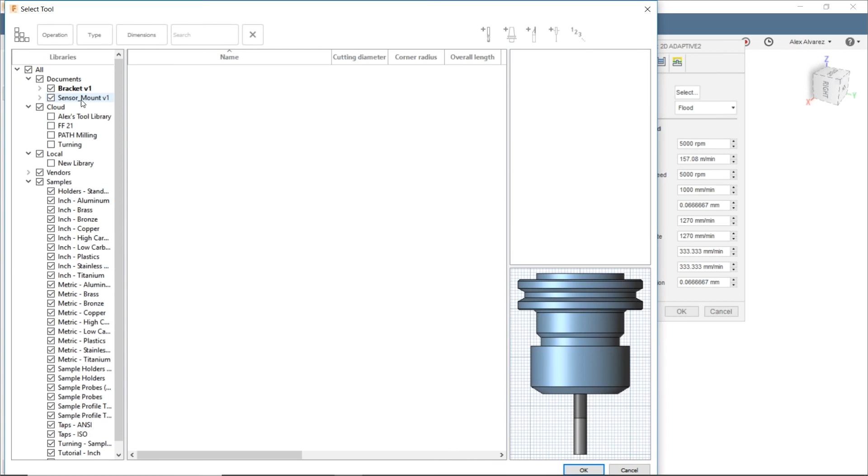Right, so right away we can see how that's going to simplify our lives, right? So now we actually have a nice little face here that we can select, and hopefully it's going to allow us to actually select that edge for our 2D adaptive, right? So we can go to 2D adaptive clearing, selecting our tool, sensor mount, 1/4 inch flat, geometry, select the outside edge there.

All right, so now if we click OK, we see that we have a nice toolpath going around the model, right? So that's one of the workarounds, or one of the ways that you can actually manipulate the body representation. Now, again, you would have to take that thousandth that you essentially split off into consideration, right? So make sure that you take that into consideration when creating your toolpaths.

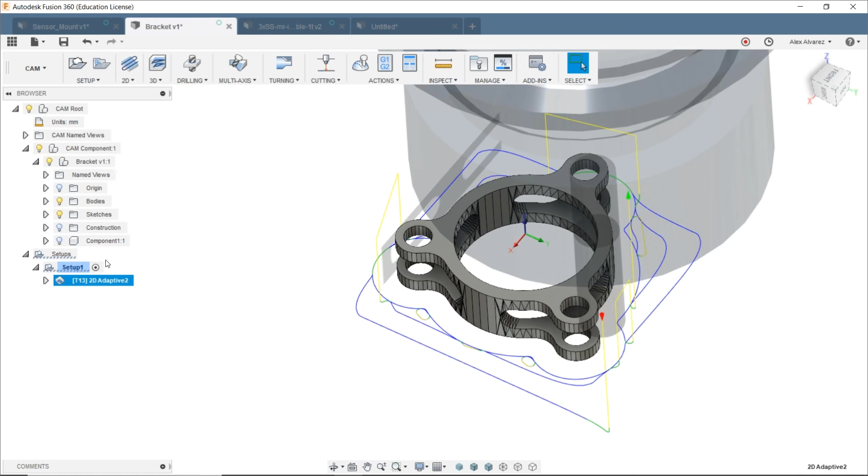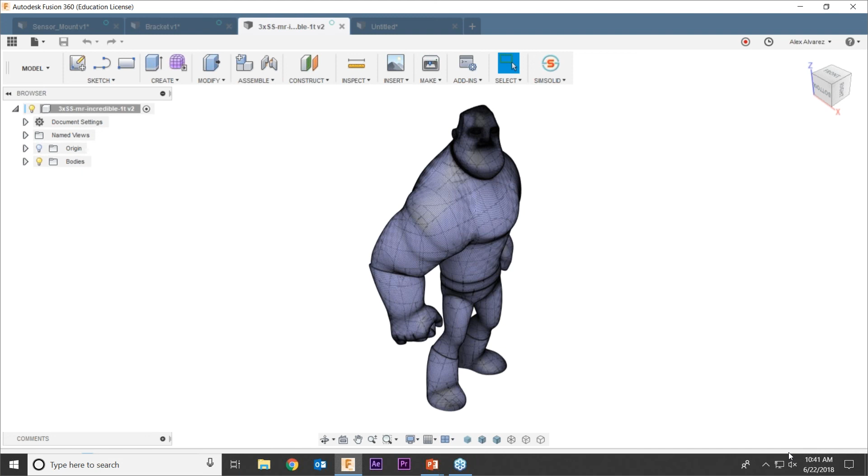Maybe even use stock to leave or change the heights of the tool so that you take that thousandth into account there. All right. So that's how you convert your STL into a B-rep, right? Body representation. So now let's go ahead and talk about how to reduce the mesh when you can't necessarily convert it to a body representation, right? So here we have Mr. Incredible, right? So tribute to the movie that just came out.

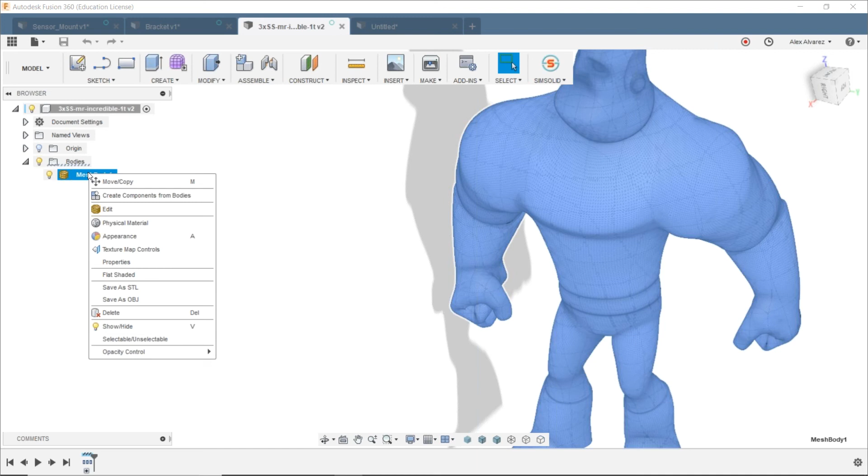So let's go ahead and change the mesh body, right? So again, we want to use the mesh to B-rep. So in this case, it's not even appearing. Let's see, change this. It's model. You might need maybe... closing the design history could be a thing. That might be it. Yep. So do not capture design history. Continue. And mesh to B-rep. Yep. So there it is, right?

So yeah, that's one of the reasons actually why you probably wouldn't see mesh to B-rep, right? So make sure that you're not capturing the design history. Once you turn that feature off, right click on the mesh to B-rep, try to convert it, click OK, and then of course you get that warning, telling you conversion has been aborted. So let's go into the mesh environment then, and let's see what we can do to actually convert or reduce some of this mesh, right?

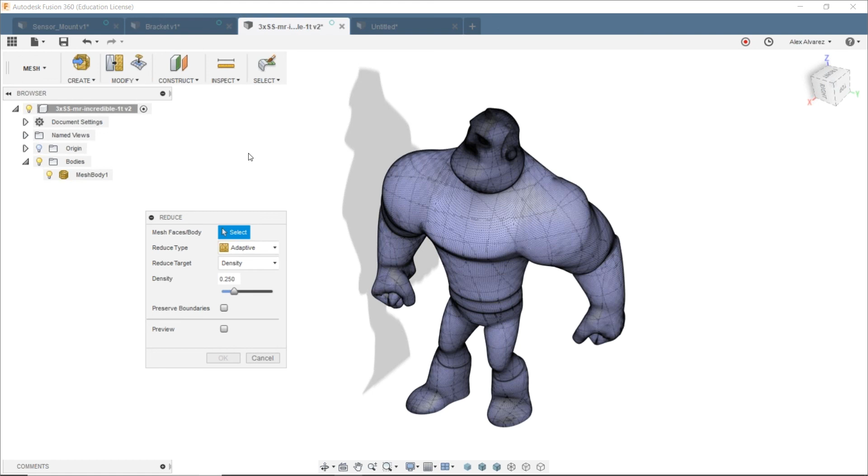So luckily, if we hit the little modify drop down, we have a remesh, but we also have a reduce option, right? So let's go ahead and do that, being that that's what we want to do. Which mesh face or mesh body do we want to change? Again, if we hover over it, we see that you kind of have to select some of this right here, right? So I find it better or faster to actually click on the mesh body itself.

Reduce type, adaptive is fine. What's our reduce target, right? Do we want to change the density of it, face count, or the tolerance? In this case, I want to go with face count. Notice that it's at, what is that, 126,000, right? So again, once you start getting into like the 15,000s, the 10,000s face count, that's when it stops. Maybe, or that's when it starts giving you that warning, right? I'm going to try my luck and try 20,000.

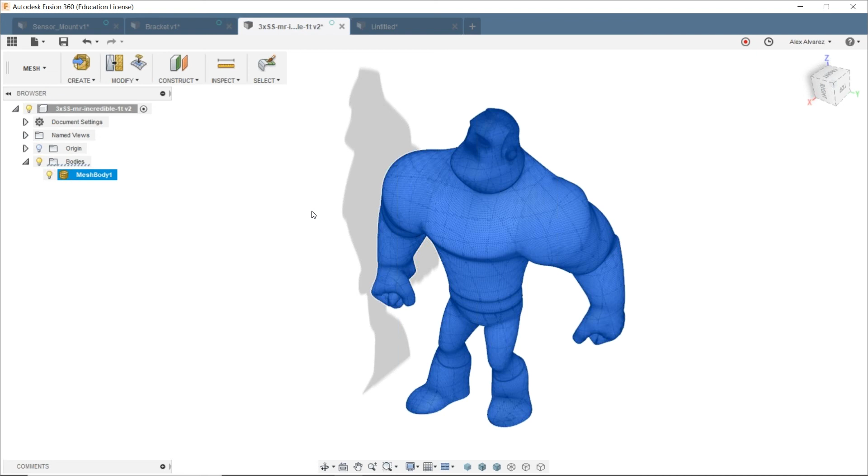Again, the lower you go in face counts, the less detail you get with this model, right? I'm going to go with 20,000. Again, I can do a preview, but that's going to maybe slow down my computer. It's going to maybe cause some issues there. So let's keep it at 20,000. I'm not going to preview it. Click OK. So we'll just let it work for a little bit.

Again, working with STLs and working with meshes can be pretty taxing on your computer, right? So you guys want to make sure that you're careful and you're always saving some of the work that you have, right? So we see here though that it's already been remeshed. Again, the mesh size is much more coarse, right? So you can tell straight away.

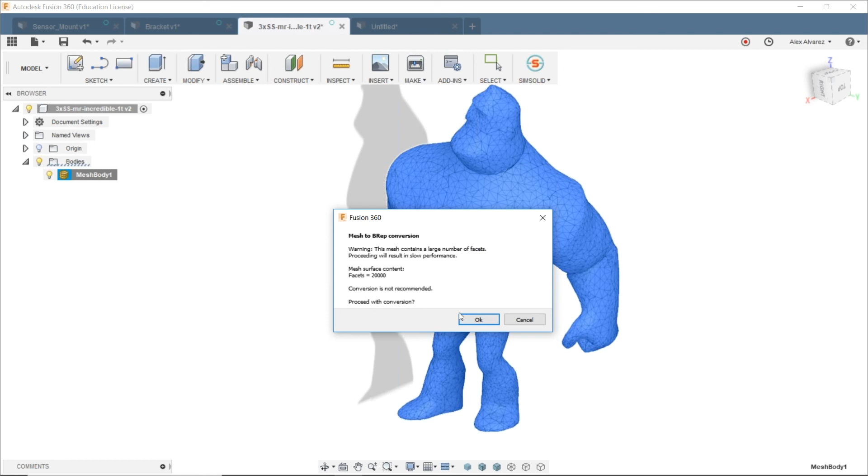So now let's go ahead and try to do that mesh to B-rep once again, right? So again, we're in the mesh workspace. Let's go into the model workspace. Mesh to B-rep, new body, click OK. Now I still get that warning, right? So the facets is indeed 20,000, but it's giving you a caution, right? Do you still want to proceed with that conversion? I do. Click OK. And let it work for a little bit.

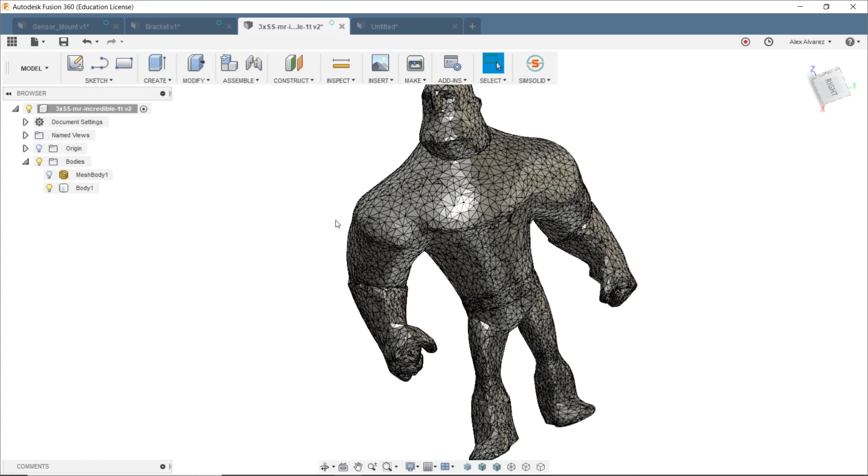And it does convert it to a body, right? In this case, again, that's it. You probably wouldn't even need to create a body. You can keep it as an STL and then just machine it or add toolpaths that way. And then use the method that I was using, right? So create sketches and then start containing some of these toolpaths to certain areas, right? And then that's going to give you, again, better looking surface finishes.

So again, this wasn't necessarily needed in order to actually machine Mr. Incredible, but it could be applied to any model, right? So again, if you do have large facets and you get that warning, that's how you would work around it.

All right, so let's get into the PowerPoint again. So that's what I had for today. Again, hopefully you guys learned a few things on how to import your STLs into Fusion, how to create some of those tight tolerance regions or those tight tolerance toolpaths on the model, right? Again, it often isn't common for machine shops or your customers to send you STLs and tell you, hey, I want this within a thou or maybe even half a thou of tolerance. They would actually send you the 3D model, right?

And then, of course, how to deal with that issue or that warning telling you that the facets are too high, and how to add toolpaths to your STL files.

So with that, if you guys have any questions that you had during the webinar, you guys can go ahead and... Yeah, we have one from Bernie Frazier. Okay. He asked, if you had STL files of multiple tools and wanted to CNC router foam for tool cabinets, would that be possible in Fusion 360 to lay them out, and I'm assuming that's like nesting, and router them all at the same time, or is it not the recommended software for that?